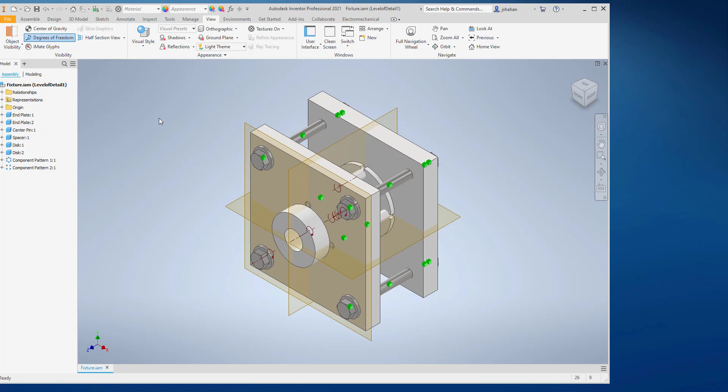Next step, interference. A couple of interferences that need to be worked on. The hole in the disc isn't big enough for the part, and it looks like the spacer's a little too long.

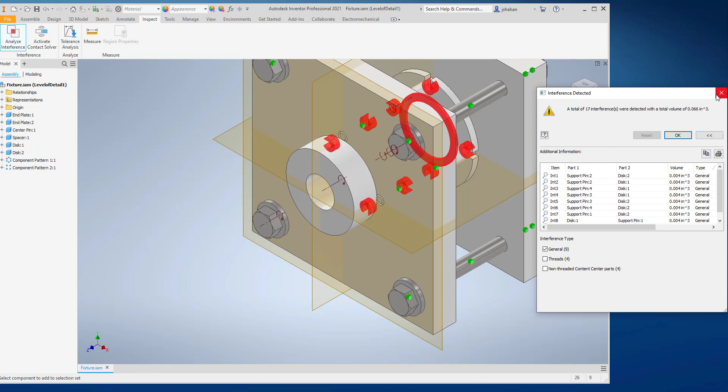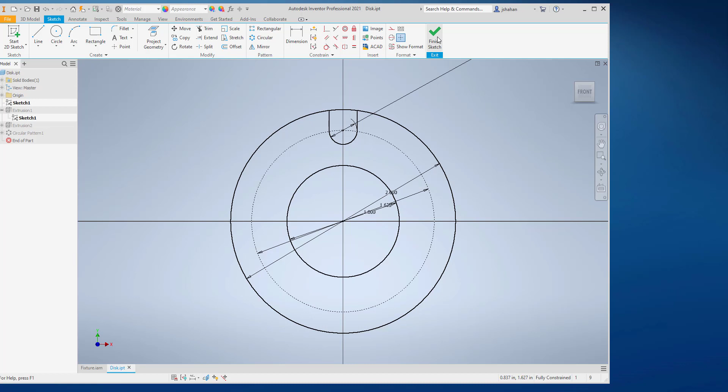Let's open the part, check the dimensions. Yep, sure enough, this was supposed to have been a diameter of 1/4 of an inch. Edit it, save it. It looks better.

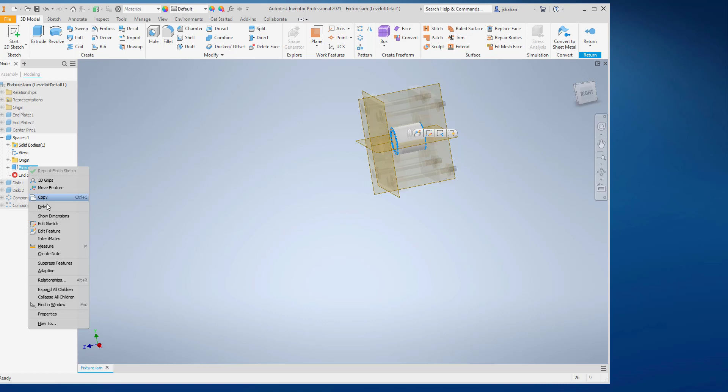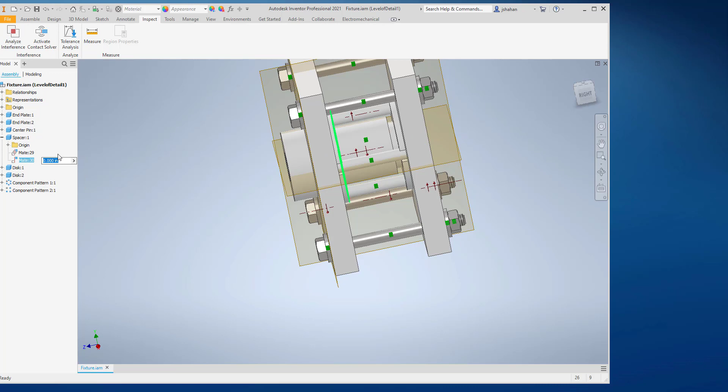Next one is to work on the length of the spacer. Let's just edit it. Let's edit the feature. And change the distance. Now let's offset it 1/16 of an inch. So it appears to be in the center.

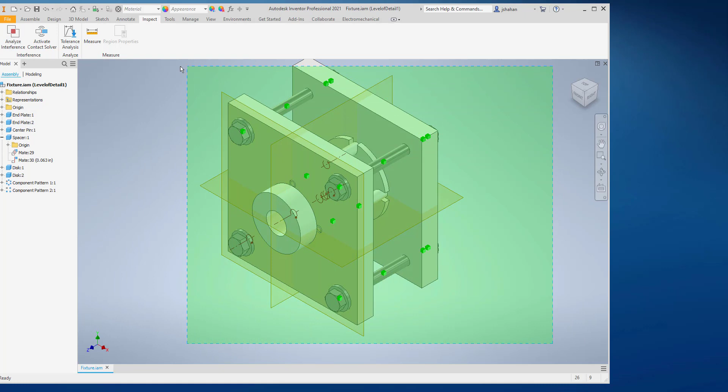Let's look a little deeper into the interferences now that we should have those taken care of. No general interferences. We got 4 that indicate matching threads, so the bolts match up with the nuts.

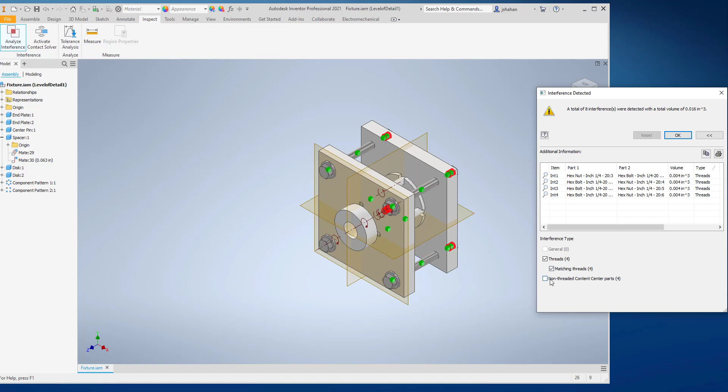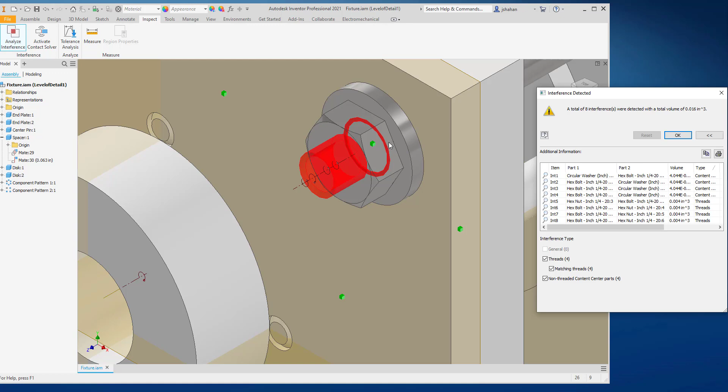And then there's some non-threaded ones. If we zoom in a little bit closer, we'll notice that there's a small interference being indicated between the washers and the bolts. For the purposes of this exercise, we're going to say that that's okay. If not, we'd have to get in there and make a different nut or a different washer, or possibly add a fillet to the washer or something to keep that interference out. But I think we're okay. So, done.